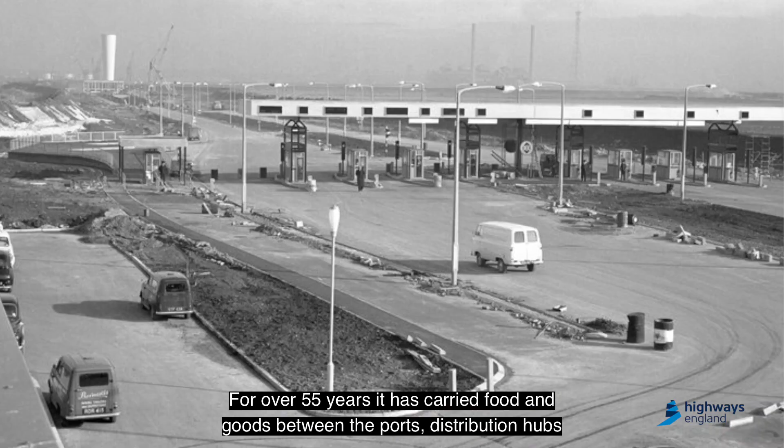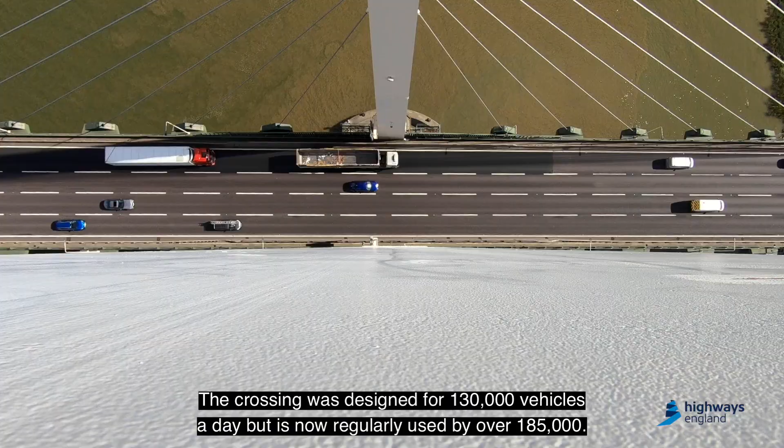The Dartford Crossing is one of our most vital strategic roads. For over 55 years, it's carried food and goods between the ports, distribution hubs and manufacturing centres of the southeast, Midlands and north. But it's now over capacity. The crossing was designed for 130,000 vehicles a day, but is now regularly used by over 185,000. Congestion caused by the ever-increasing volume of traffic and regular incidents means huge tailbacks spilling onto the local road network are now a regular occurrence.

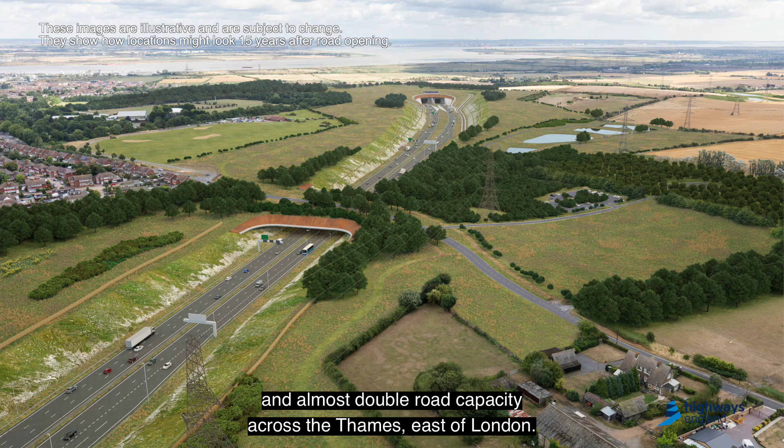By building one of the largest road tunnels in the world, the Lower Thames Crossing will take up to 36,000 vehicles off the Dartford Crossing every day and almost double road capacity across the Thames east of London. When the new crossing opens, it'll provide a direct, reliable, free-flowing connection between Kent, Essex and beyond that will add billions to the UK economy.

But perhaps more crucially, the new crossing has an important role to play as we plan life after COVID. If we get the green light, it will support and generate opportunities for apprentices and graduates and help local businesses upskill and win work. And it's our aim for you in the local community to benefit as much as possible from this investment.

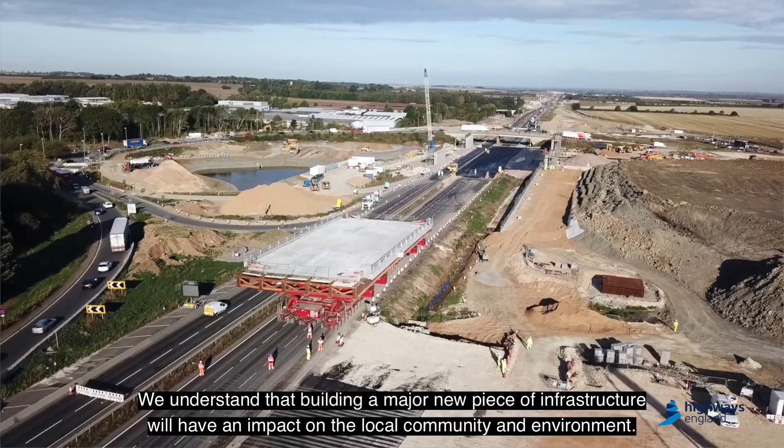We understand that building a major new piece of infrastructure will have an impact on the local community and the environment, and we're absolutely committed to not only reducing that impact but to enhancing the area. We want this new road to be the most environmentally sustainable road ever built in the UK, and we look forward to sharing more information on this in the coming weeks and months. In the meantime, here's an update on our progress.

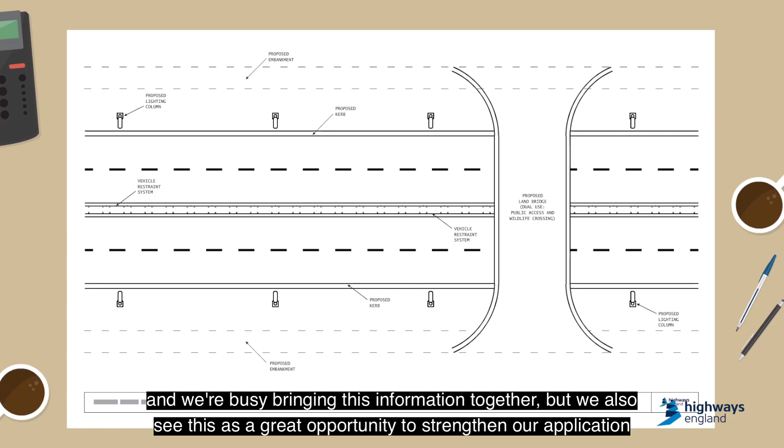We're absolutely determined to bring you these benefits as soon as possible, so it's essential we maintain momentum on the project. For those of you who've been following the project's progress, you'll be aware that we initially submitted our planning application back in October, which we then withdrew following some feedback from the Planning Inspectorate. The Planning Inspectorate has asked us to provide some more information on some technical elements of our application. And we're busy bringing this information together, but we also see this as a great opportunity to strengthen our application as we continue to work with key stakeholders to make the Lower Thames Crossing the best it can possibly be.

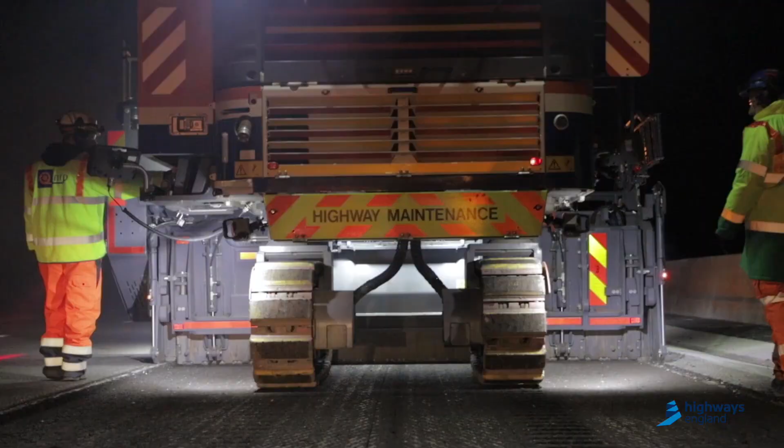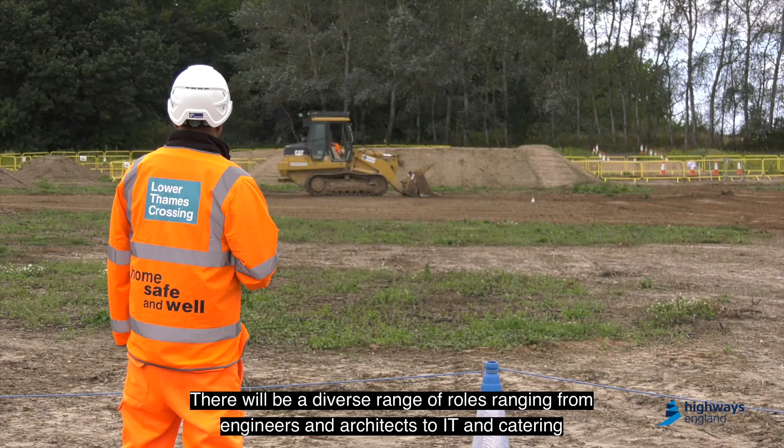While the project will add billions to the UK economy once it's open, it'll also help our economic recovery. We recently announced that we'll support 10,000 jobs during the peak of construction. That's over 22,000 jobs over the lifetime of the project. There'll be a diverse range of roles ranging from engineers and architects to IT and catering, and it's our aim to make sure that it's the local community, people, businesses and students who'll benefit.

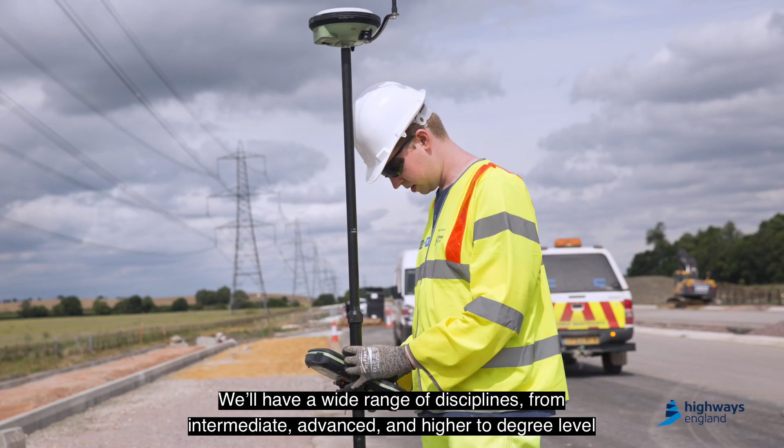We're also committed to creating hundreds of opportunities for apprentices, graduates and trainees over the lifetime of the project. We'll have a wide range of disciplines from intermediate, advanced and higher to degree level, with job roles ranging from designers to digger drivers. Our support for the next generation of workers was showcased in February when we launched a brand new webpage that features a host of helpful new resources, such as inspirational video content featuring current and former apprentices on the project, as well as career timelines for our people to give you a feel for their occupational journeys, as well as the different roles and backgrounds.

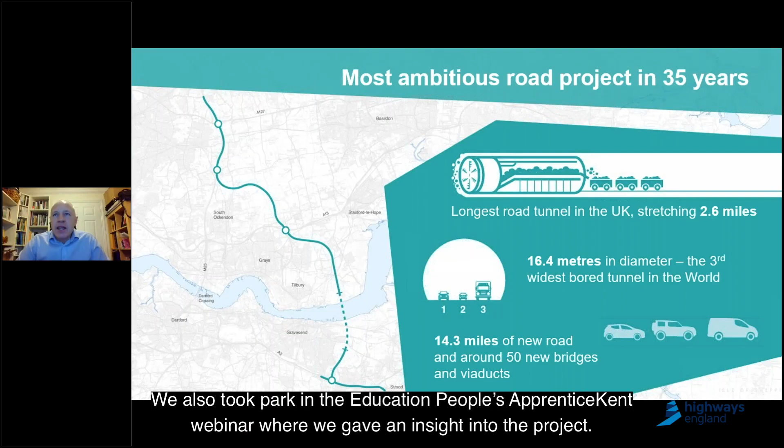We also took part in the Education People's Apprentice Kent webinar, where we gave an insight into the project, what we'll be looking for in our apprentices when we do that recruiting, as well as taking part in a Q&A session with attendees. The Lower Thames Crossing will be a career starter for so many people, as well as a relauncher for those who are looking for something new.

One of the many career opportunities that will be available on the project was recently showcased in a new Channel 5 documentary about the history and culture of the River Thames. Emma Toms, who's one of our geologists working on the project, hosted presenter and actor Tony Robinson and explained how our plans to connect Kent and Essex will actually unlock the potential of the Thames estuary.

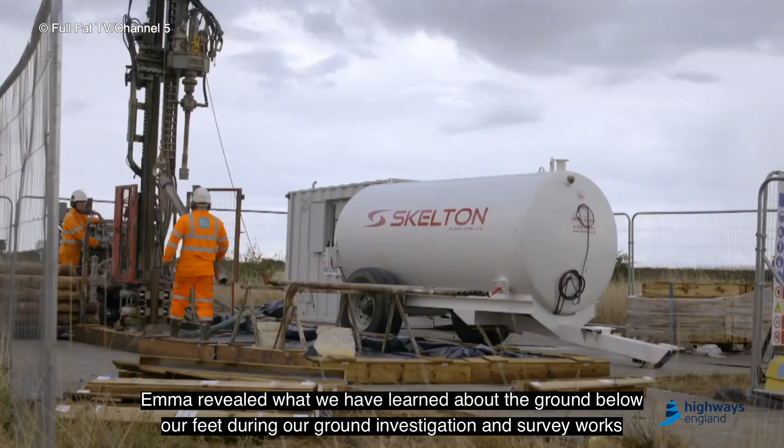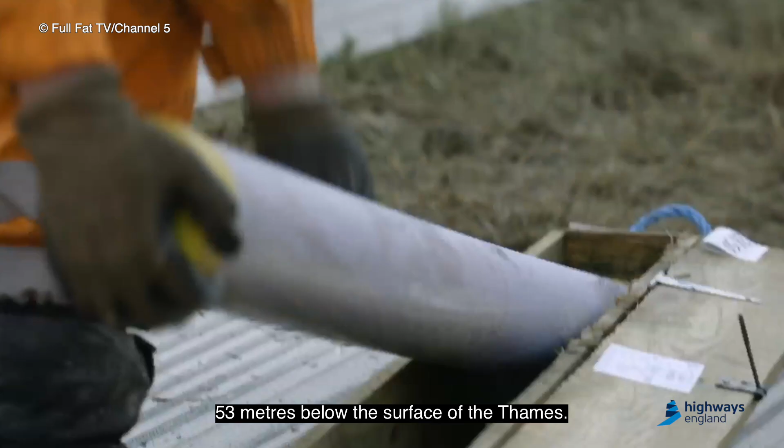Emma revealed what we've learned about the ground below our feet during our ground investigation and survey works, and how this is shaping our plans to construct the longest road tunnel in the UK, 53 metres below the surface of the Thames. You can find out more information about our works and a link to the full documentary on our website.

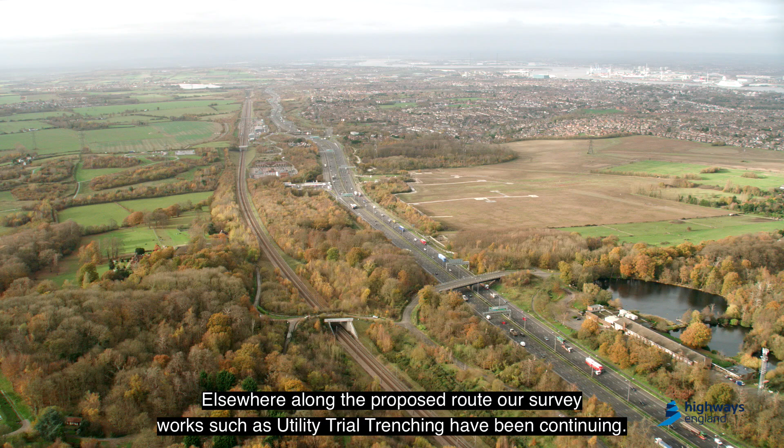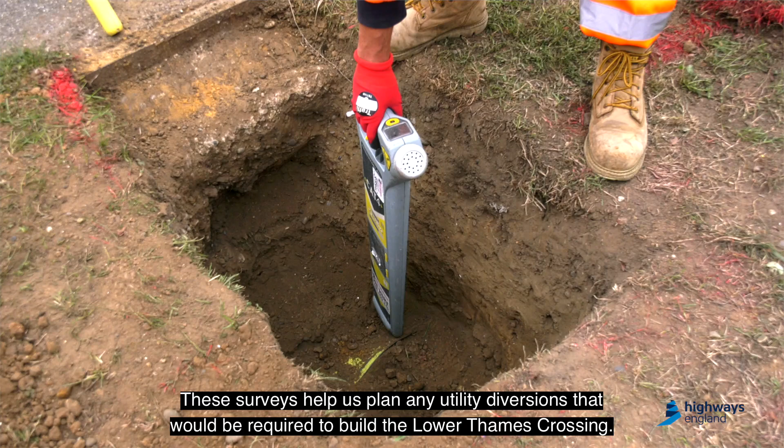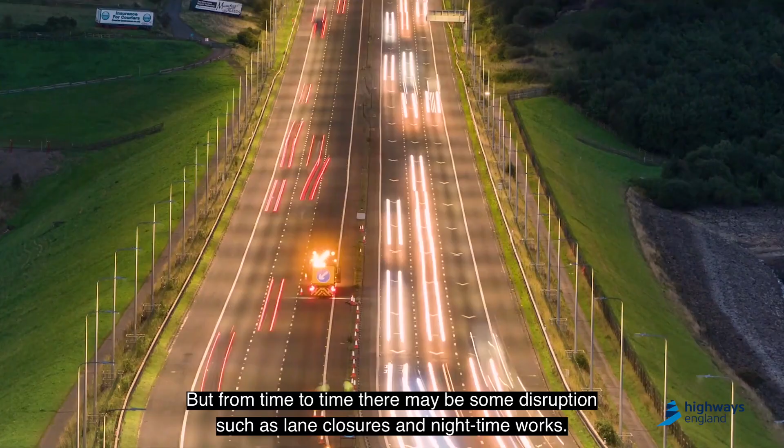Elsewhere along the proposed route, our survey works, such as utility trial trenching, have been continuing. These surveys help us plan any utility diversions that would be required to build the Lower Thames Crossing. Our priority is to continue carrying out this programme of works in a way that will have the least impact on local communities, but from time to time there may be some disruption, such as lane closures or nighttime works. Do keep up to date with this programme of works and sign up for alerts by visiting the Lower Thames Crossing website and, of course, continuing to follow us on Facebook and Twitter.

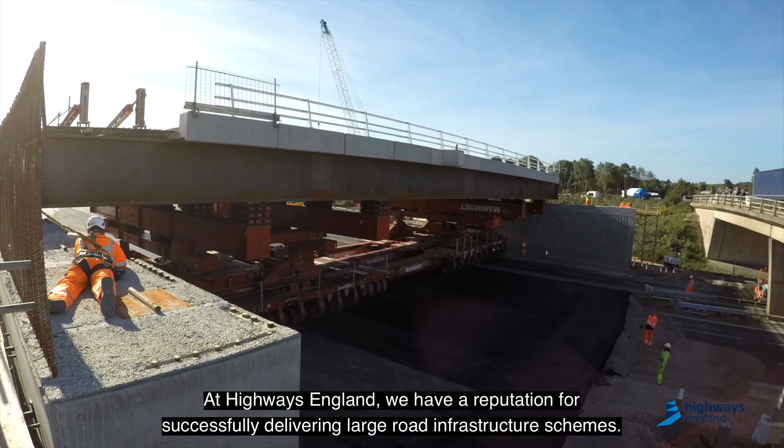At Highways England, we have a reputation for successfully delivering large road infrastructure schemes. For example, we delivered the A14 Cambridge to Huntingdon improvement scheme on budget and more than 8 months ahead of schedule. We want to apply some of that same track record and experience to building the Lower Thames Crossing, which is why we're bringing in expertise from across the industry to help us deliver the project.

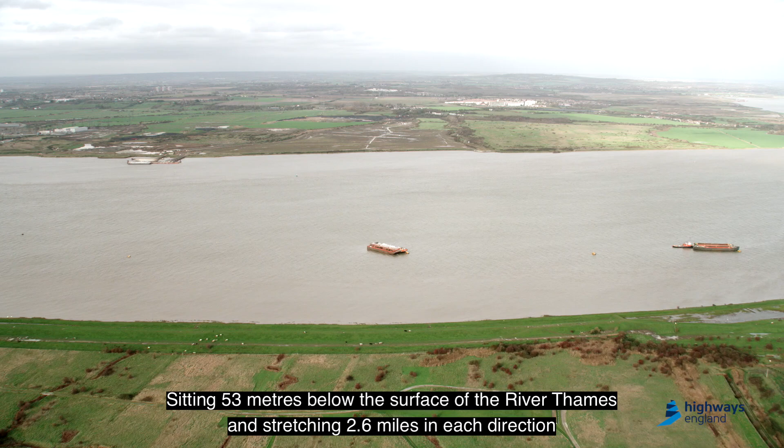Work has already begun to build this team. It started back in November when we invited bids for our largest contract ever tendered to build the longest road tunnel in Britain. Sitting 53 metres below the surface of the River Thames and stretching 2.6 miles in each direction, the 16-metre diameter tunnels will be the widest in Europe and the third largest bored tunnel in the world.

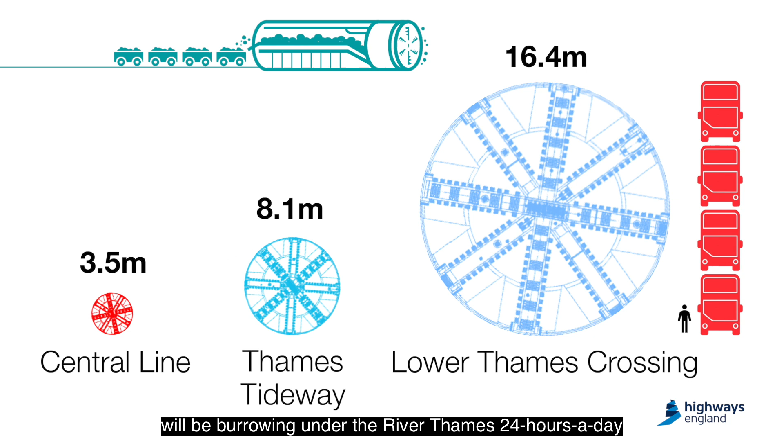When work gets underway, the Lower Thames Crossing will be the most significant tunnelling project in the world. Two mega mud-munching tunnel boring machines, or TBMs, will be burrowing under the River Thames 24 hours a day and will churn out enough excavated material to fill the Shard 7 times over.

As always, safety remains at the heart of the project, and the new crossing and tunnels will be designed and built with new and emerging technologies, making it fit for the future.

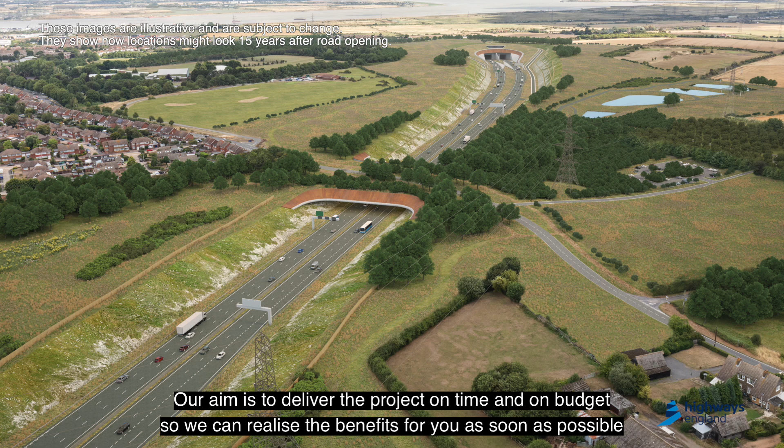Last month, we announced that Jacobs have been awarded the integration partner contract for the project. Our aim is to deliver the project on time and on budget so we can realise the benefits for you as soon as possible and give the best possible value to the taxpayer. The integration partner will play a vital role in helping us do that by creating a collaborative relationship between us and all of our partners. They'll bring a diverse range of capabilities to create a strong support function to Highways England and deliver a project the country can be proud of.

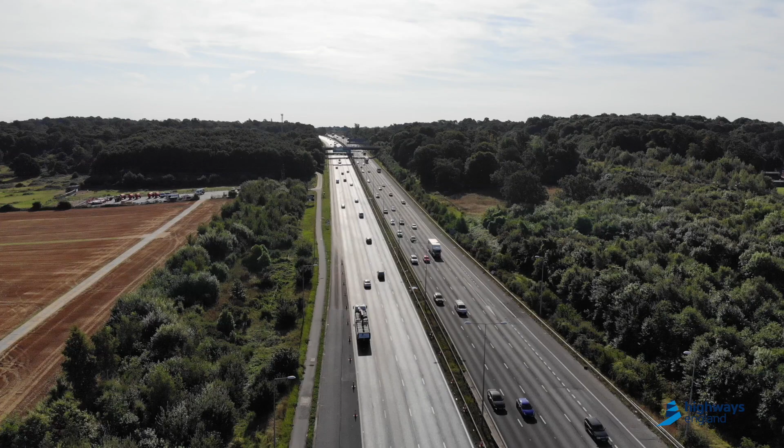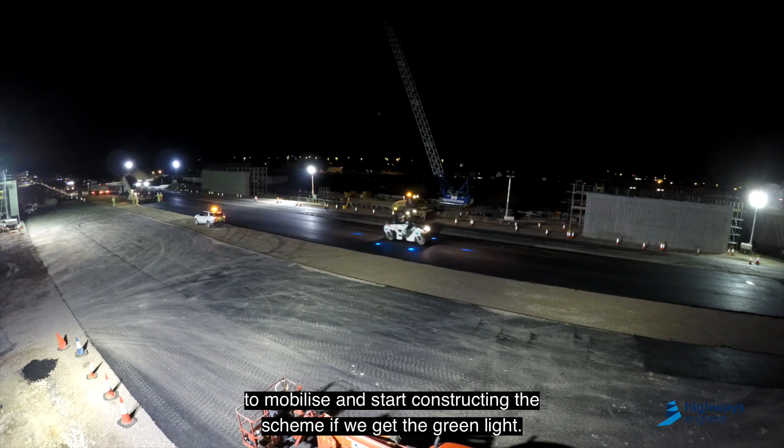We'll also begin our search for partners for the Kent Roads and Roads North contracts to build the new routes north and south of the river. Building this team is hugely important as it puts us in the best possible position to mobilise and start constructing the scheme if we get the green light.

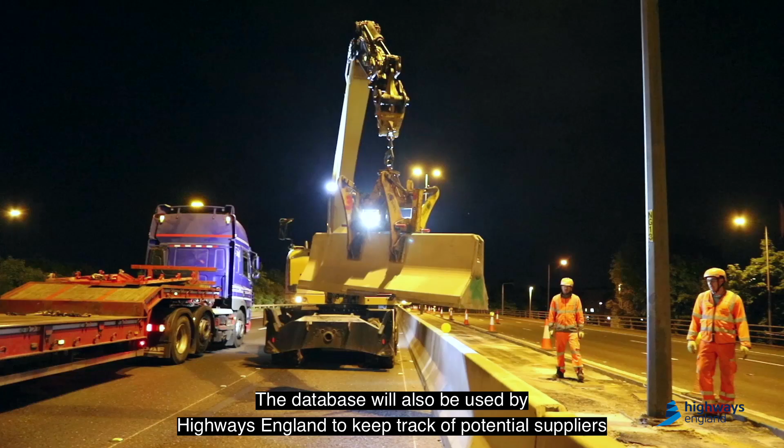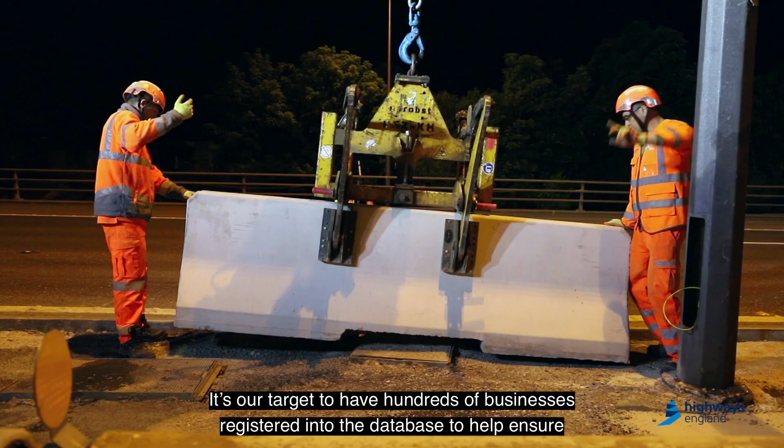The database will also be used by Highways England to keep track of potential suppliers who may want to help us deliver other projects and ongoing maintenance and improvement works. It's our target to have hundreds of businesses registered into the database to help ensure as much of the work needed to build the crossing goes to local firms.

So far, over 250 businesses have registered on the database, which is fantastic. But we don't want you to miss out, so please do visit the website to register your details.